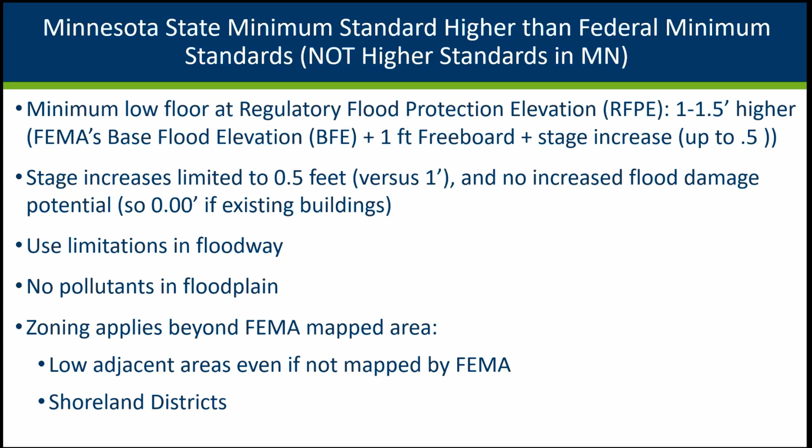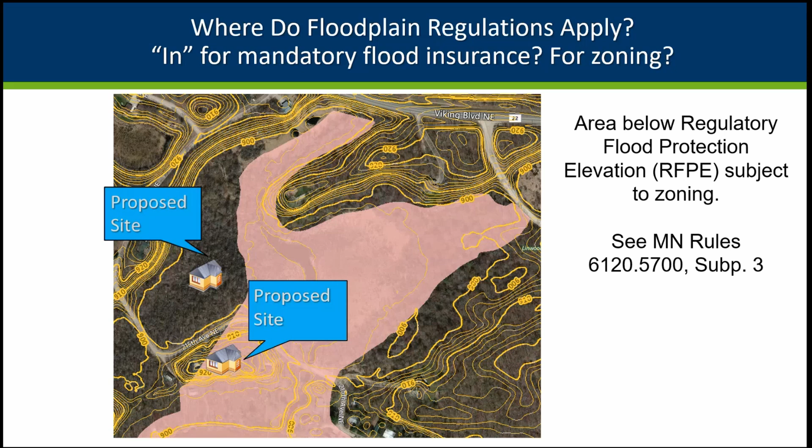We also have some regulations that regulate beyond the FEMA mapped flood zones. One of them is that if there's an area adjacent to the FEMA flood zone that's below the flood elevation, our state rules say you're still regulating that area below the regulatory flood protection elevation, even if the FEMA map doesn't show it included. Again, that's a state higher standard.

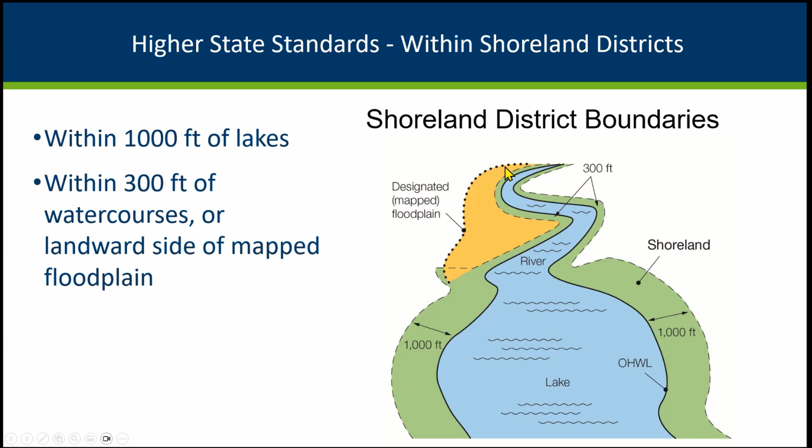Another big area where our state minimums get into areas beyond the FEMA mapped floodplains is in our shoreland districts. That's within 1,000 feet of lakes and either 300 feet of a river, or if the mapped floodplain goes further, that's part of the official shoreland area.

Within shorelands, we have lot size minimums, lot width minimums, and setbacks for structures. Within half the setback distance, we've got limitations on what kind of grading and vegetation removal can take place. We've got nice vegetation management and aesthetics screening requirements, and bluff protections, with a lot of good reasons for those bluff protections.

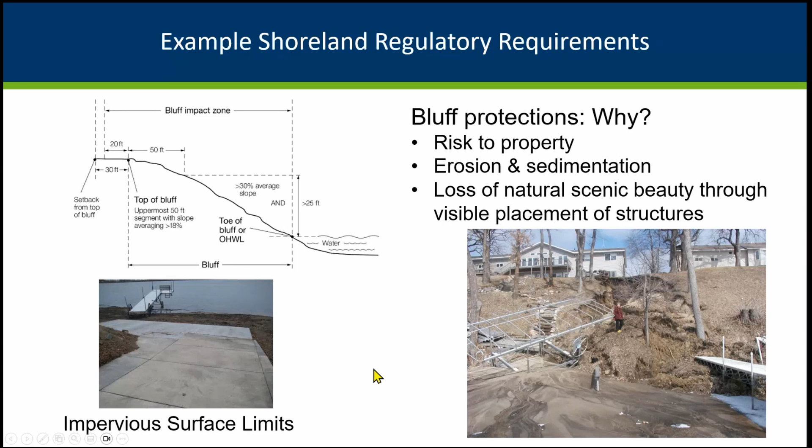Trying to keep that erosion from the bluffs out of the lakes and rivers, preventing buildings from being at risk, and preserving some of the scenic beauty that gets lost when you've got eroded areas. Another area is we have impervious surface limits in our shoreland rules.

The other reminder is that within shoreland districts, we do still require minimum elevations of buildings. Some of you have heard us talk before about how our shoreland rules were actually based on ones adopted first in Wisconsin. This is one of the differences between our shoreland regs and Wisconsin's — we added low floor requirements within that 1,000 feet of lakes and 300 feet of rivers, even if it's not in a mapped floodplain area.

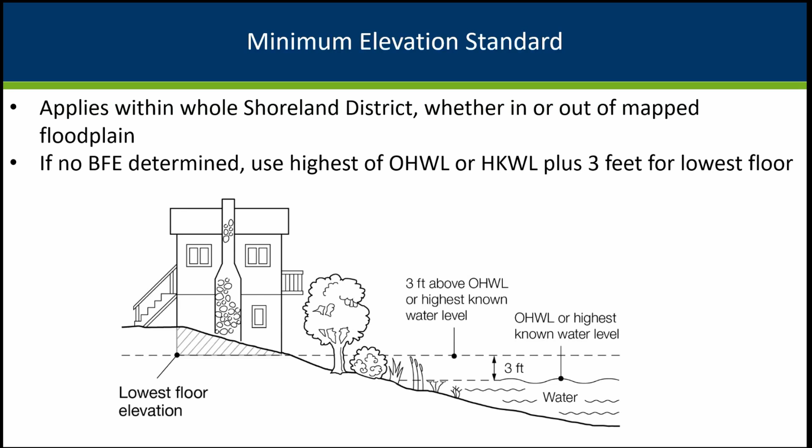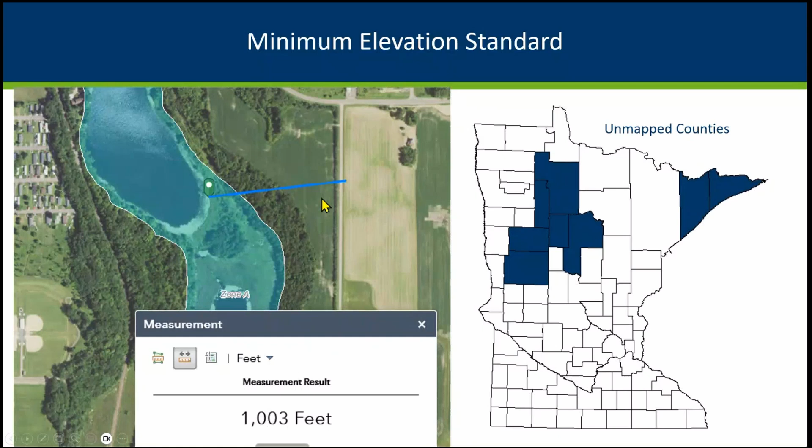Here's an example where we've measured 1,000 feet from the lake, and they still have to require the minimum elevations. For instance, in our 8 counties that don't have any FEMA floodplain maps, because they knew we had shoreland rules and that most development was within 1,000 feet of those lakes, they do have minimum elevations still in those areas.

Other higher standards exist in many states, and I was surprised when I started learning about what other states had, because I've grown up in Minnesota and worked here for many years and know our regs, but we've got higher standards in terms of regulating our public waters.

We don't allow filling in of those areas to create development areas. And we've got our more recent, relatively speaking, 1991 Wetland Conservation Act, where we protect a lot more wetlands beyond the public waters inventory of basins and require replacement of those areas that are allowed to be filled.

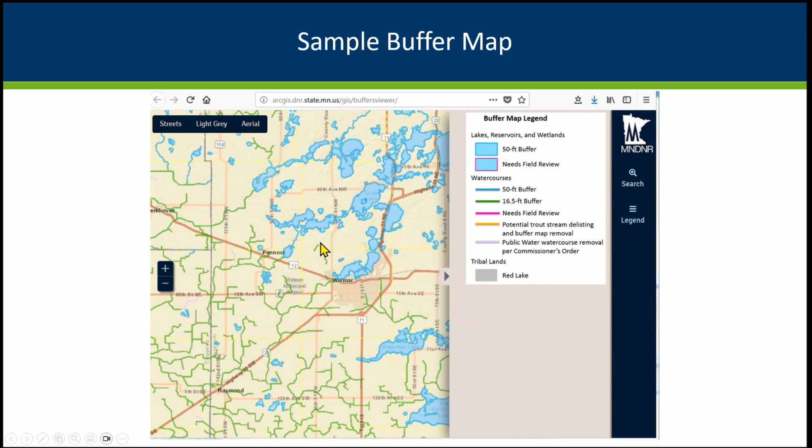And we had the buffer mapping effort a few years back. If you're not familiar with that, or newer to the state, we do have a website mapping these areas and showing the kinds of buffers that we have—either the smaller buffers more on ditch areas, or the 50-foot buffers more on the public waters.

Again, those are just a brief, quick update of some of the higher standards we've already got at the state level. So today's presentation is focusing on higher standards that go beyond the Minnesota state minimum requirements.

There are a lot of great reasons, and what makes sense in your community will vary, but many of the things we'll be talking about have to do with health and safety protections, protecting people from flooding risks. We're having increasing flood magnitudes due to changes in climate, and we'll talk about that a little bit more later.

For some areas where flood insurance is mandatory, higher standards can help save money on insurance premiums or prevent needing mandatory flood insurance, allowing you to choose how much coverage you want because you're not officially in the floodplain. There are communities that have many policies and have gotten into the Community Rating System, something FEMA runs.

If you're not familiar with this and your community has a lot of flood insurance policies, definitely reach out to us—we can tell you more about this program. It's basically a program where you show FEMA the higher standards, the better outreach and communication you have, all the good things you're doing to protect people from flooding and its impacts.

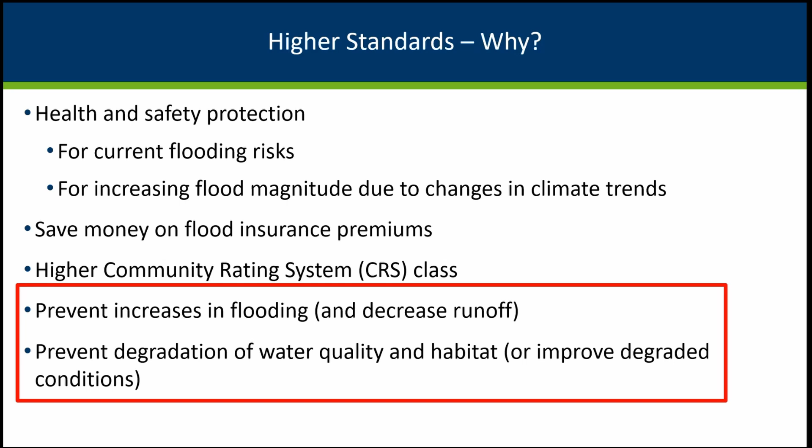Which is why we decided to call this 'floodplain and watershed higher standards,' because everything within the watershed gets reflected in those areas of potential flooding.

And speaking of watersheds, just a few slides here with Walter the Watershed. I have to give credit to Jenny Shilcock—she did these drawings, probably 10 years ago, but I think they show the progression nicely.

So here's Walter, he's happy: unaltered floodplain, free-flowing streams, diverse plants and animals, nice clean water. The stream banks are stable, we've got good infiltration and storage. Maybe we've got a barn here, a little cabin, but not a whole lot of development and disturbance.

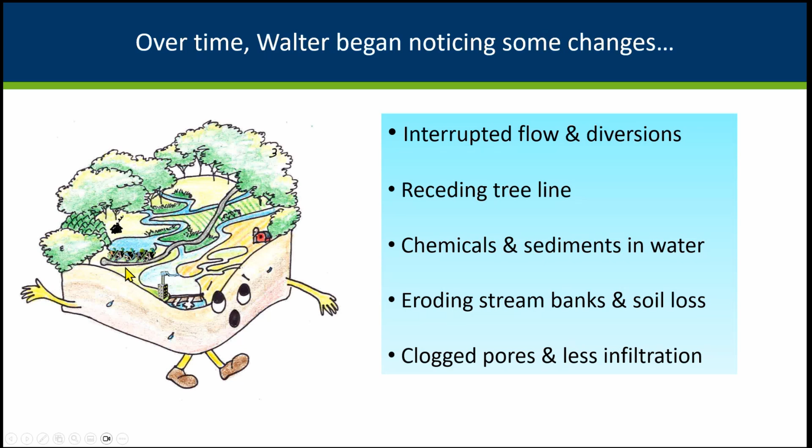But as development occurs, we start getting some interrupted flows. Here's a little dam, a bit more development, tree lines being removed, more areas going to ag or to buildings. We start seeing eroded banks, less infiltration, and more runoff in this case.

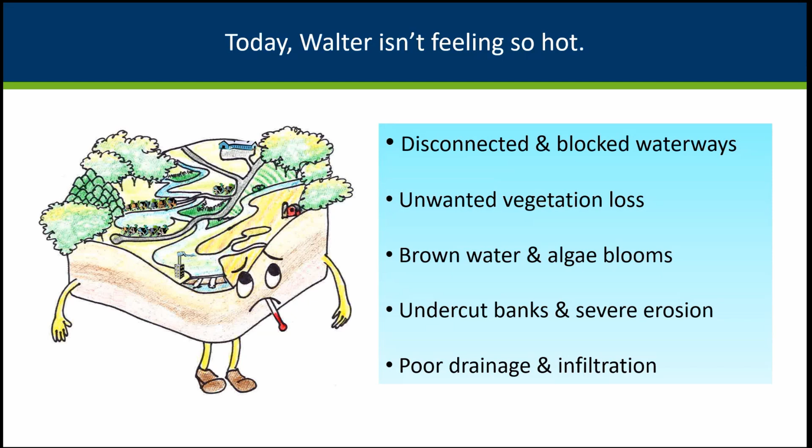And then even more development—we get bigger development, pretty much most of the vegetation has been altered. We definitely start to see brown water, algae blooms, lower water quality, poor drainage, a lot less infiltration, a lot more runoff. Who is responsible for the watershed's health, and how can we help Walter?

Because it really is the whole watershed we want to be looking at. Our regulations can help, but some other things we want to keep in mind is not just the land use, but that we are actually seeing changes in the rain. We're seeing it's a little bit warmer overall, the pattern over the decades, but definitely more of the water's coming in bigger and intense storms.

We're seeing just since 2000, the rains that are 6 inches or more are 4 times as common. And the rains that are bigger than 3 inches are up 65% over the last few decades. We're seeing more storms all times of the year, and that also means more ice jams and related risks during those times.

And we're seeing longer periods of high water in the last couple of years, and I'll have a couple slides to show this. Also more risk of landslides as we have longer, wetter periods, which sets up the situation where those steep areas are more at risk of sliding.

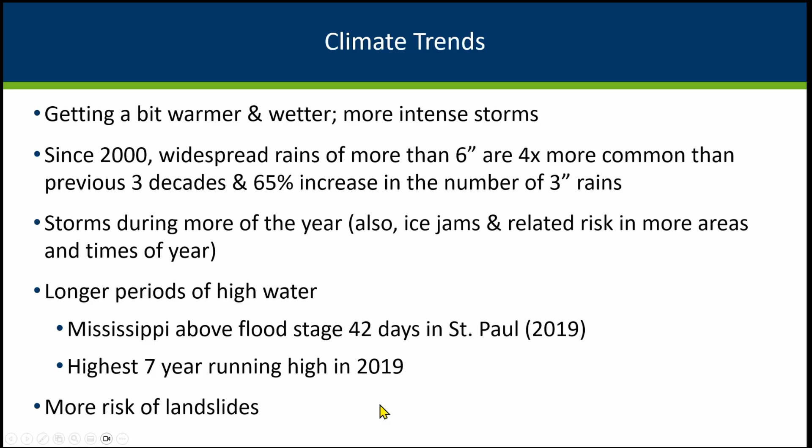If you're not familiar with this, you might want to take a look at the DNR's climate trends site. We've got some nice information there, and some cool tools. You can look in particular at temperatures and precipitation. You can choose one watershed or adjoining watersheds, or in this example I chose the entire state, and play around with it to look at the temperature and precipitation trends in your area.

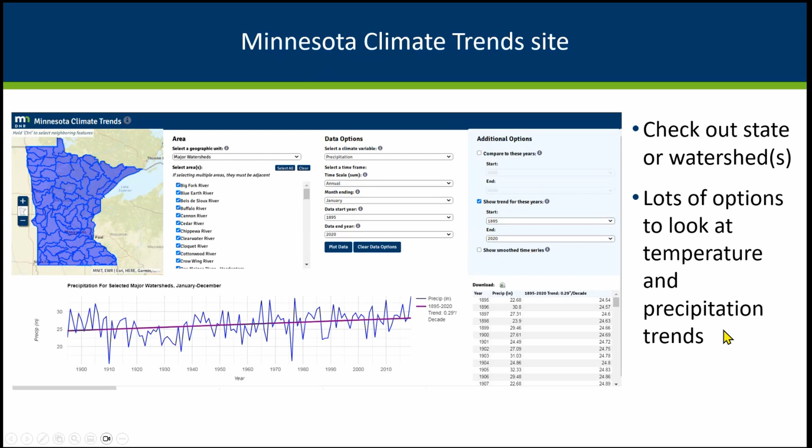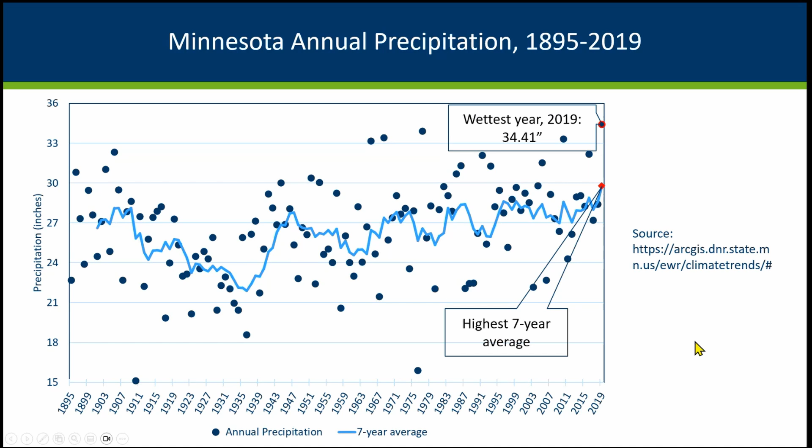Here's data pulled out of here that Kenny from our state climatology office put together, showing the 2019-2020 period, the longest, wettest period for the 7-year average. We were seeing way more of the lakes that were very high, especially those that didn't have outlets, because we'd had a particularly long period of wet. Now we've had more droughts, but we still are seeing those big storms and rain at times that we haven't had in the past.

Some of the other things we're seeing that we want to think about from a flooding, potential flooding, and land use perspective is we're seeing higher groundwater in some areas. Those water tables were high, especially at the end of that 7-year running period with the highest precip on record. So there's good reasons to look at minimum elevations in the entire communities, not just within the floodplain or the shoreland where it's required.

We're seeing more of those landslides and the stream bank erosion. We can get into some of the reasons for that in maybe another presentation, but we are definitely seeing more of that, and some of your communities in particular are seeing that.

We're seeing more of the urban flooding. Again, the big rains are affecting more areas that weren't built with stormwater management in mind. Many of the older developed areas in our region, our FEMA region, in Chicago area and other states, have had some really big rains and impacts that affected many, many people outside of the FEMA mapped areas in recent years. And speaking of unmapped areas, many areas were not mapped when FEMA first was doing the maps in the 70s and 80s.

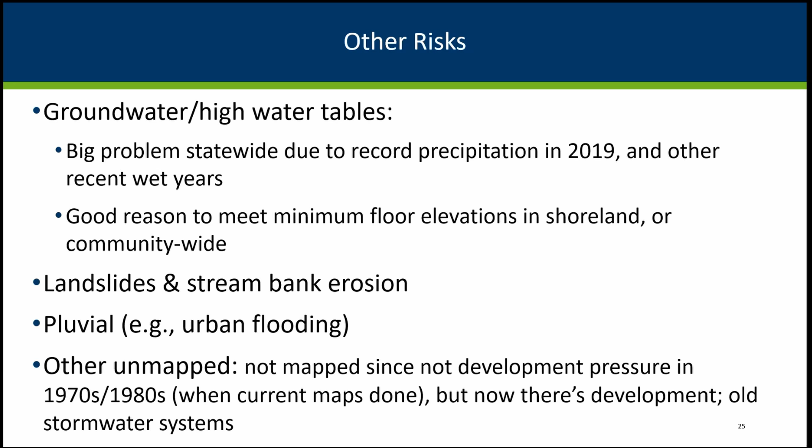And now as they update the maps, they tend to just keep updating the areas that were already mapped, even though there's many streams and flood-prone areas that they did not map in the past, and we're starting to see development there. So the other issue is that our state laws only are part of the picture.

Let's say this is your community boundaries, and say you've got a stream. You'd have regulations along that stream, either the public water regulations or your shoreland regs that cover within at least 300 feet, or the floodplain if it goes further, or you might have wild and scenic rules or other rules, or lakes where we regulate within 1,000 feet. But we've still got all these gaps in our communities where it's part of the watershed draining to those water bodies or to the low areas. And we're seeing more of those low areas within our communities being impacted because they don't have the stormwater infrastructure in place.

So why would you want to have protections for your community? Well, protecting your landowners, protecting your neighbors, protecting those emergency responders and first responders during times of flooding, not putting them at risk. If you have updated data showing your risk is higher, it's a good time to be looking at, should we be raising our standards?

Should we be updating our modeling and our maps? Looking at the water quality. Many parts of our state, we're relying on people who recreate in our areas and enjoy our lakes and rivers. They're fishing, they're hunting, they're enjoying their cabins. And water quality, we know, is tied to values of the properties along those lakes and rivers, and all those natural benefits that are the reasons people are coming to those areas.

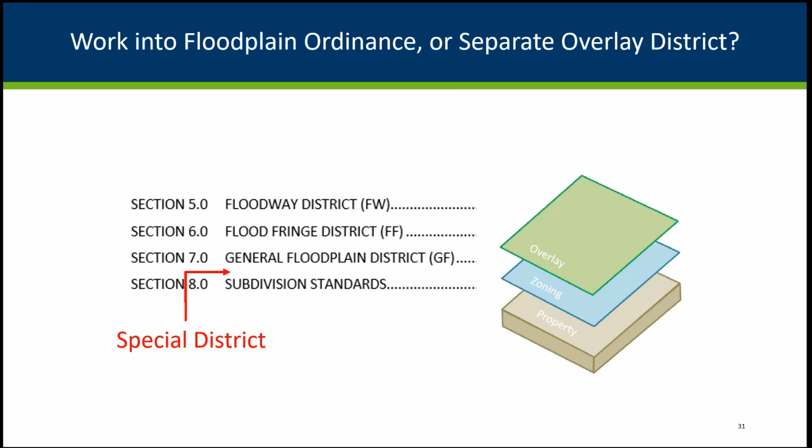In our floodplain model ordinance and our shoreland model ordinance, we show recommended higher standards with blue bold font in the version on the website in a PDF format, and we include these when we send out our recommended ordinance to communities, showing which ones are higher standards.

Even the communities that go through and look at each one of those blue bold areas and ask, does this make sense for our community - a very high percentage of those we're finding communities do adopt as higher standards. They look at the ones that are applicable, and might delete ones that aren't applicable. It's really been nice to see that.

We used to have these higher standards as a separate document shown to communities, but much fewer of those would get into local ordinances when suggested separately. Now that we've incorporated them into our model, many more of them are included.

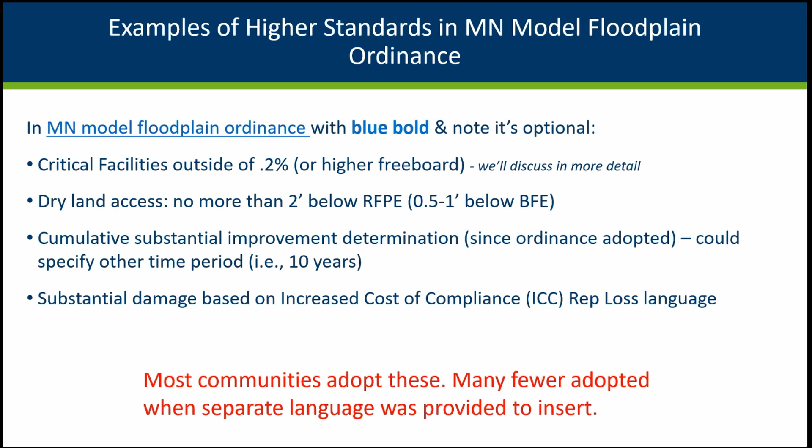We'll talk about examples in the remainder of the hour - things like higher standards for critical facilities, dry land access so you're not leaving buildings stranded in the middle of deep floodplain, higher standards for non-conforming buildings, and for substantial damage, basing requirements on repetitive loss language. This allows people to get increased cost of compliance as part of their flood insurance - basically a rider that if you have substantial damage based on repetitive losses, they can get extra up to $30,000 to help bring the building into compliance, making them more resilient for future floods.

Again, what can communities do? You've got your toolbox with higher regulations, either those suggested in blue font in our state model floodplain or shoreland ordinances, or other ones we're recommending elsewhere, like in this presentation and on our innovative regulations pages on our website.

We also want to encourage you to look at a bigger toolbox, tools beyond higher regulations - think about watershed level planning and prioritizing. In Minnesota, we're doing that now with our One Watershed, One Plan, with great work together at the watershed level between local government, the state, others, and between communities.

Better risk communication isn't necessarily regulations, but doing a better job helping people know where the risk is in their community and making them aware of optional resources. Some communities are looking at better policies for community properties, like making more land native vegetation for natural infiltration. Many SWCDs and watersheds have great trainings and cost share options for these beneficial activities.

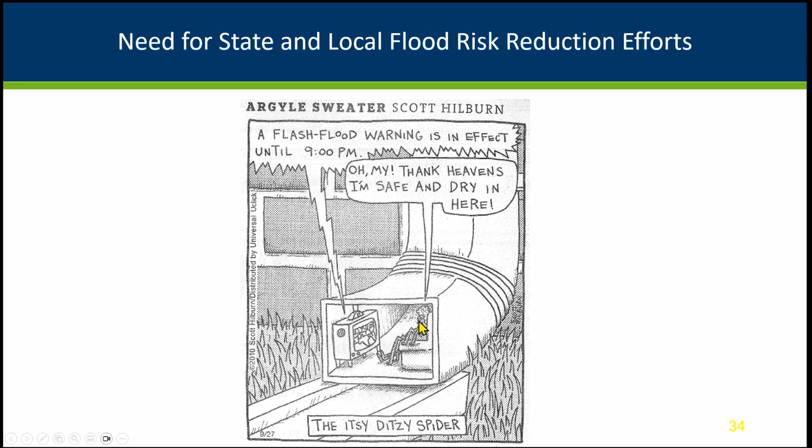The cartoon here: flash flood warnings in effect until 9 p.m. - our itsy ditzy spider, oh thank heavens I'm safe and dry in here. This is an example of where some communication on true risk might be helpful.

We've been working on a floodplain page like this. I had originally hoped to have it ready before today's presentation, but didn't quite get it there yet - we're hoping to have it ready in the next month or two. So let's start talking about some different categories of other higher regulations, identifying and regulating risk outside those flood-prone areas, outside the FEMA mapped areas, or outside the shoreland areas.

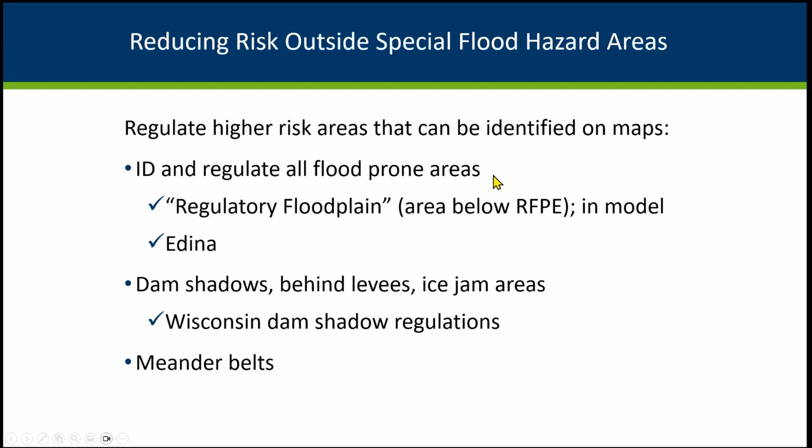But as we allow development in the flood fringe area, that squeezes in the area that floods have to go during floods, and it actually increases the flood elevations. If you looked at that increased flood elevation, you're really impacting areas that go outside the mapped areas.

So here's this concept of regulating, looking at your regulatory flood protection elevation, which includes that stage increase due to allowing filling in the flood fringe, and works in our state minimum 1 foot of freeboard. It can cover a bigger area. In the flat areas, it's going to be a pretty wide area it would cover. In the steeper areas, it's not as wide.

This is an option. This is the concept the feds have started to use for federally paid for projects done by public entities, that if federal funds are going into road improvement or mitigation projects, they're supposed to be looking at this extended area adjacent to the floodplain and building higher and safer. So this is one way to look at it, is regulate the area covered by the full regulatory flood protection elevation, not just that covered by the 100-year floodplain or something in between.

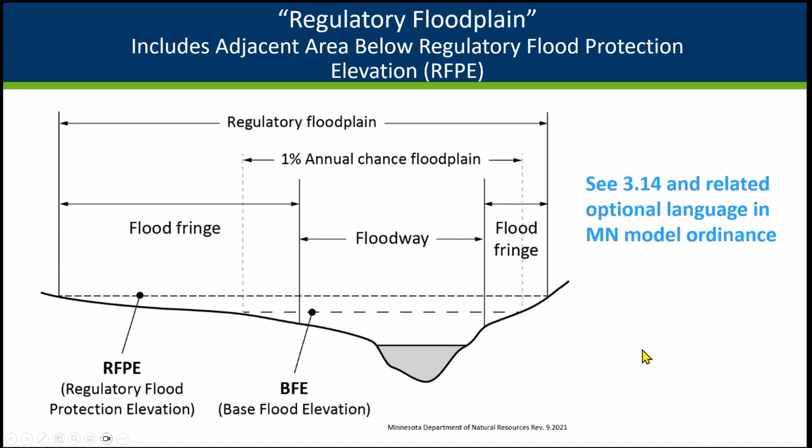State of New Jersey, they actually regulate - I think they take 1.25 times the flow and figure out what that covers, and they regulate that area. So that's a different approach, if you like that kind of scientific based approach, that's another way to look at extending the area you regulate.

They're limiting the fill, or at least the net filling, and they're requiring permits if someone wants to do work in these areas, making sure that they're not filling in their storage areas that are helping to protect the buildings in that community. So for a first tier suburb like Edina, this is a great way to help protect those citizens. You don't have as many ways to protect them and reserve areas because most of the development has already occurred.

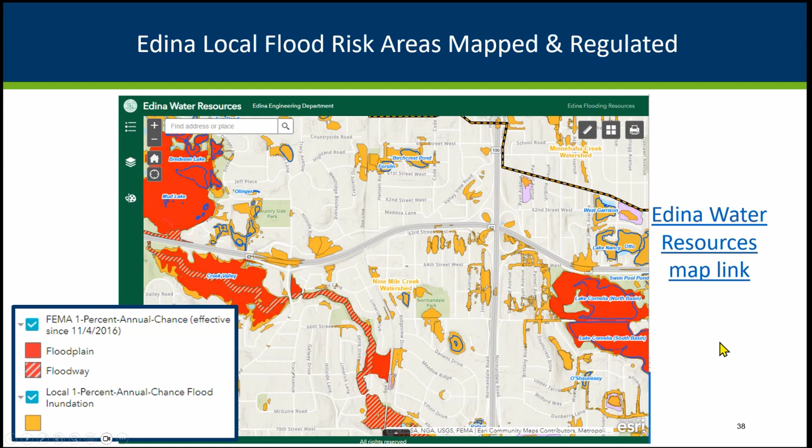Or another example would be if you're downstream of a dam, and those are higher risk areas, especially the high hazard dams. We don't have state or federal minimums saying you need to protect those areas, but definitely something to think about.

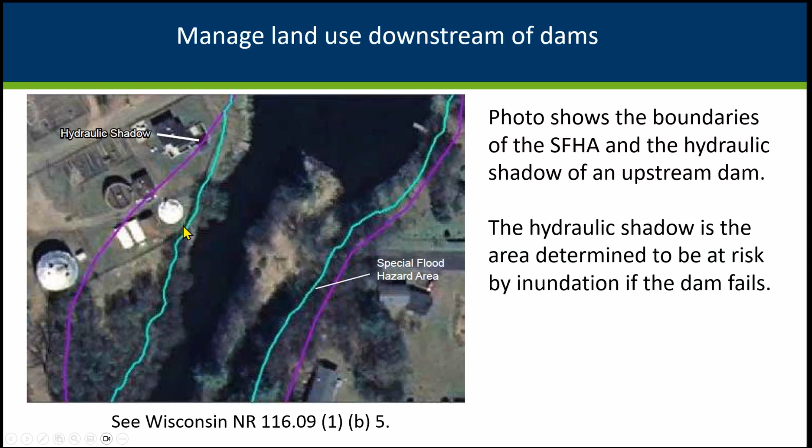We've got the Wisconsin law that's been on the books, I think for like 50 years, been on their books for a long time anyway. They do protect that hydraulic shadow area downstream of dams.

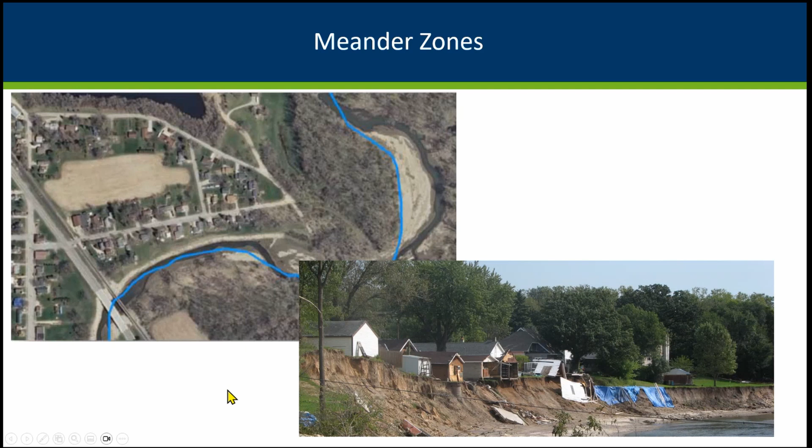Anyway, this is something you do see, rivers are dynamic. Here's an example in southeast Minnesota. The stream had been here, but then after the 2007 flood, it moved, it cut into this block of buildings - that's what you're seeing here. It moved over here. Another great example of dynamic streams, and thinking about what can we do to protect some of these buildings. There's a lot of good reasons to have a meander belt, some kind of mapped area where you're going to protect within that area or have extra levels of setback or protection.

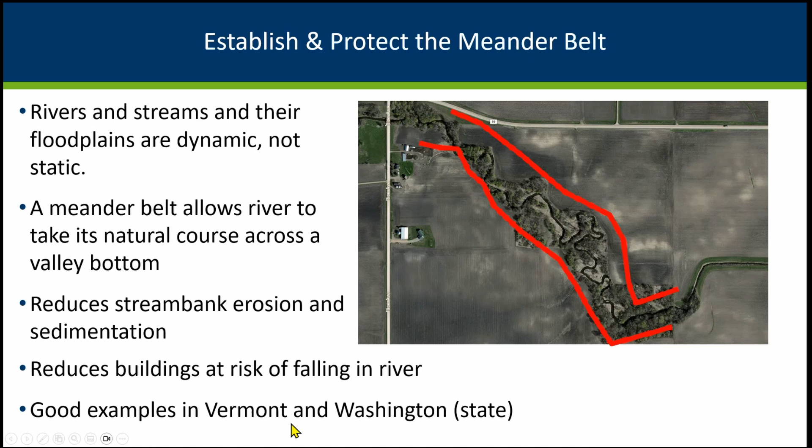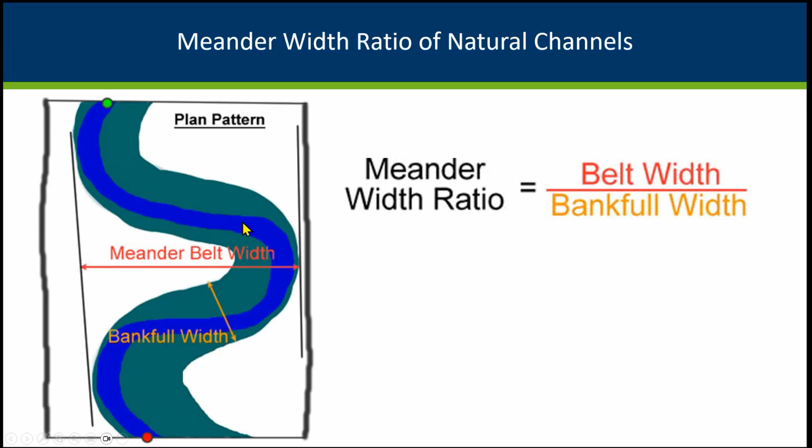Allowing the stream to take its natural course, but basing where you map on science, trying to reduce the stream bank erosion you're seeing and reduce buildings at risk of falling into the river. We've got slides showing examples from Vermont and Washington state, and there's science behind it. If you're interested, we can work with folks who study natural streams, looking at stream age, soil types, and slopes to determine the expected meander width in an area. There's a lot of good information here, including an info sheet with background, and more from the River Ecology Unit on their website.

Just a quick mention of other states—they do have some standards. Again, you look at what makes sense in your community.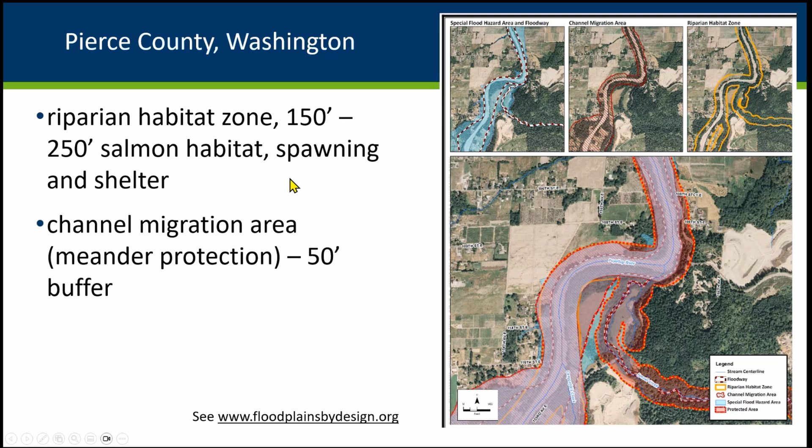In Washington, they're very concerned about salmon habitat and spawning, so they're looking at setbacks for that, and at the channel migration area to try to protect those zones. They've got a newer version of their site with some cool videos explaining the reasoning and main concepts behind it. If you want to learn more, I suggest taking a look at the floodplainsbydesign.org site, which is a public partnership between the state of Washington, some communities, and private organizations.

In Vermont, they've got some great information on their page, including a 'Living in Harmony with Streams' resource aimed at citizens. A lot of that could be applicable in many of our communities for outreach, if you're looking for outreach ideas.

Other things you could do: cities with lakes and rivers that haven't been told by DNR that they had to adopt shoreland management regulations—maybe because they were small cities or didn't have development pressure at the time those priority lists were made—can still adopt shoreland management regulations or a variation on them. They can always adopt them even if DNR hasn't required it, looking at minimum elevations and setbacks community-wide.

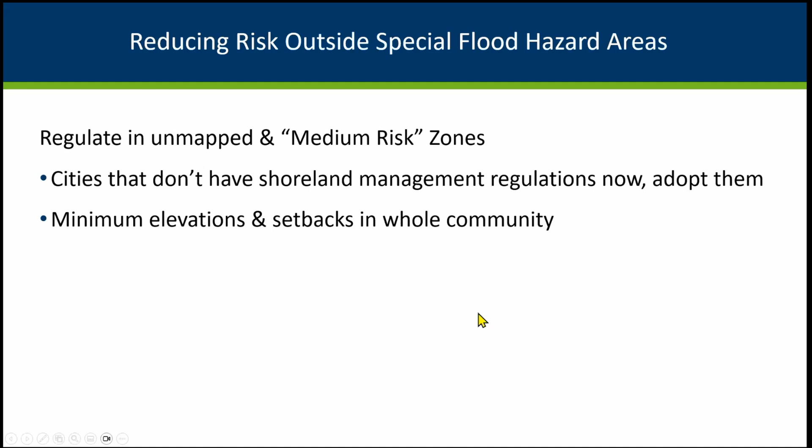In the 80s and 90s, Plymouth was growing like crazy, with lots of developments going in around these wetlands. They weren't big enough or wet enough to be classified as lakes and rivers covered by shoreland management regulations. So they couldn't do things below the ordinary high water mark, but above it, there were no state minimums they had to meet. I was the area hydrologist at the time, and I made lots of comments suggesting that even though it wasn't a shoreland district, they should really look at bigger setbacks and minimum elevations.

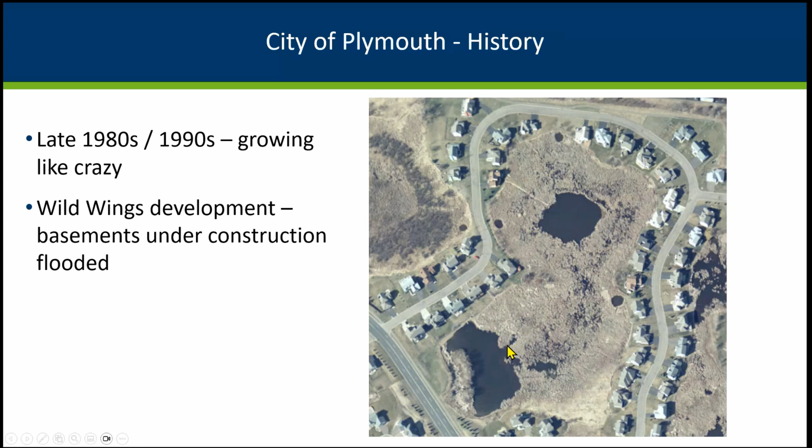They didn't listen. Here's another development, same situation. Then they had some rains, and I had great pictures—I can't find them now—but I had pictures of when the foundations had gone in, and they looked like swimming pools, because there'd been a big rain and they'd put in basements right next to the wetlands.

So they learned their lesson from that development. Then there was another development where the builder told everyone, 'Call DNR, and if DNR will let you do it, you can do it.' So I had all these people calling me saying, 'I want to build out my yard, I want to put in a deck, I want to put in sheds.' And I kept having to tell them, no, you can't do any of that—that's below the ordinary high. You've only got 10 or 20 feet between your house and the ordinary high; that's where you can do things.

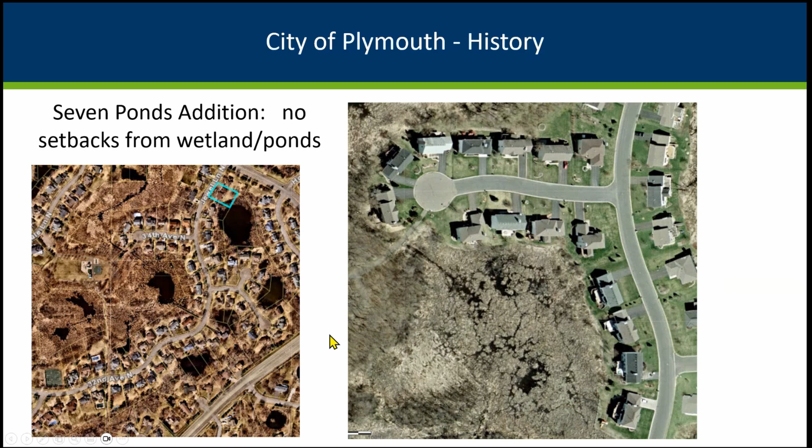As a result of these people's complaints, their elected and appointed officials became more aware—this is where those two developments were. People became more aware of this, and the city adopted minimum elevations for low floors citywide.

They had a city stormwater management plan, and they divided everything into sub-watersheds, figured out their 1% in all those areas, and started requiring a 2-foot elevation above the 100-year for all those basins, all the flooding sources, including all the little stormwater ponds.

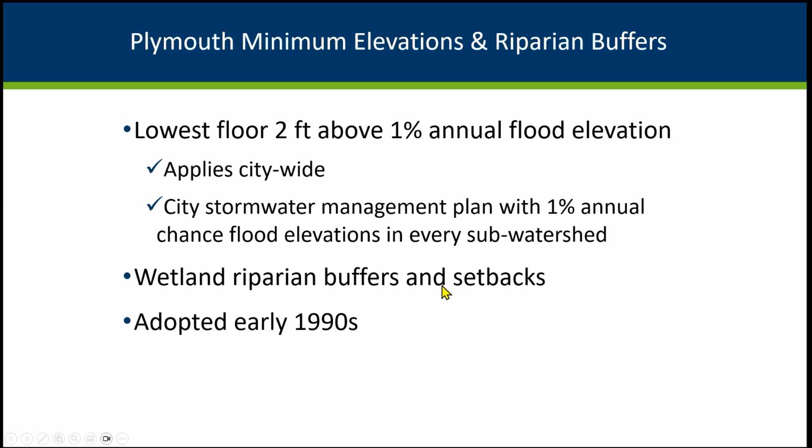They looked at their wetlands and realized parts of the city were still developing, so they asked what they could do to protect some of these areas for the future and have setbacks that are more reasonable. They classified their wetlands into different categories - higher quality, middle quality, lower quality - with different setbacks and buffer areas depending on wetland quality. A great effort that the city went through, and they did a lot of work when they did that.

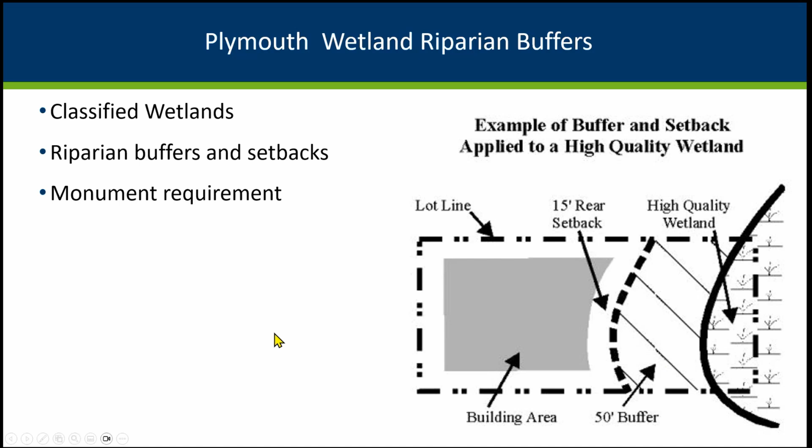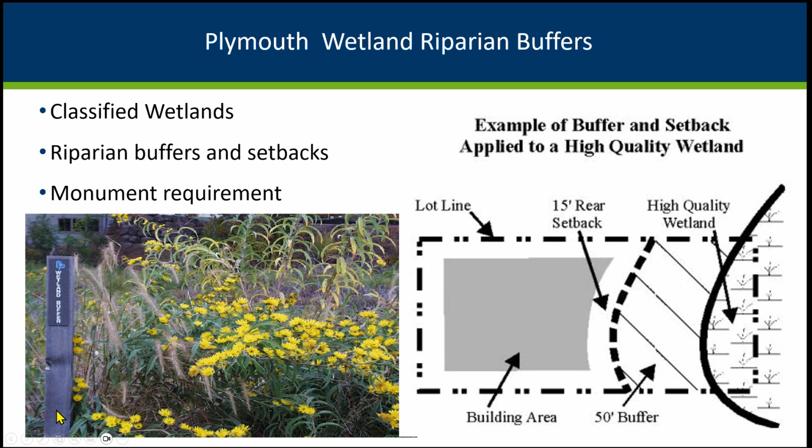They also added a monument requirement at the edge of the wetland, putting up monuments showing where the buffer went to. So they had this mandatory buffer with nice physical markers so people were very aware of where the edge of the buffers were. This is a picture taken in the 90s when they were first doing that.

Moving on, talking about completely different requirements, looking at restricting critical facilities in the floodplain. Cedar Rapids - you probably heard about the big flood they had there. They had a hospital and a prison on an island that got flooded, and that was very traumatic, trying to get records out of there and get people out of those flooded areas.

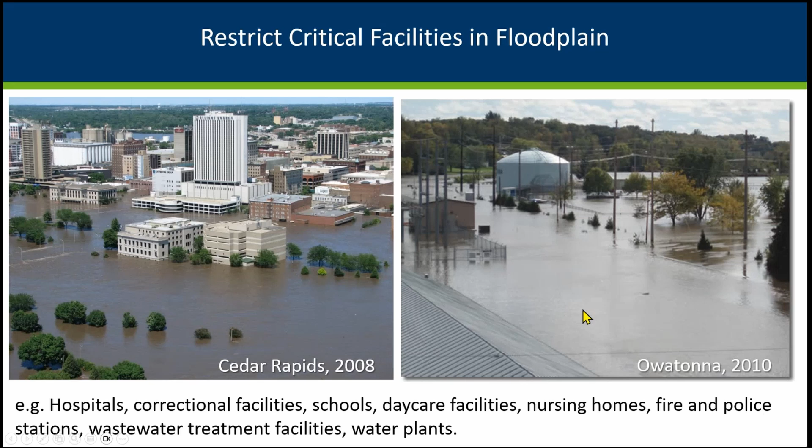Picture from Owatonna in 2010. Here's working on Methodist Hospital in St. Louis Park in 2014 when we had high water, and a well house in Owatonna. Just all of these places where we've got either the main utilities for communities - water supply, electric supply, wastewater treatment. Even if most of the buildings were protected, if they haven't got those utilities, then a huge part of your community can be impacted by a flood.

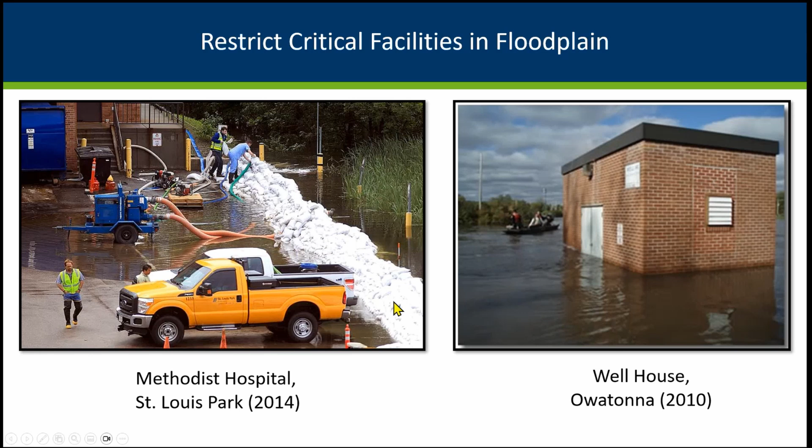And they don't need the extra work and stress of trying to build all these temporary sandbag facilities. So trying to save that grief during floods, building smarter and safer when you are putting in new utilities or other critical facilities - hospitals, nursing homes, schools, prisons, some of those kinds of things. Trying to not have any new ones in the floodplain for sure, and then retrofitting and fixing what you can for the old ones. This is in the national training that FEMA offers at their Emergency Management Institute.

I knew that they had this picture in their training when I went to it like 15 years ago. Gary was just there a couple weeks ago - they still have this picture and this example in their training that they use at EMI, showing a Rochester facility that had flooding, and unfortunately 4 people died in that '78 flood.

The good news is that Rochester's done a lot of great work. Since '78, they've got all their reservoirs around the city. They did other work, and had a really big similar magnitude flood just a few years ago, and we saw little impact. So kudos to Rochester and the many other communities that have done a lot of good work in Minnesota. But also a reminder that as new facilities are planned, look at whether they're in the 500 year floodplain, look at higher protection for them.

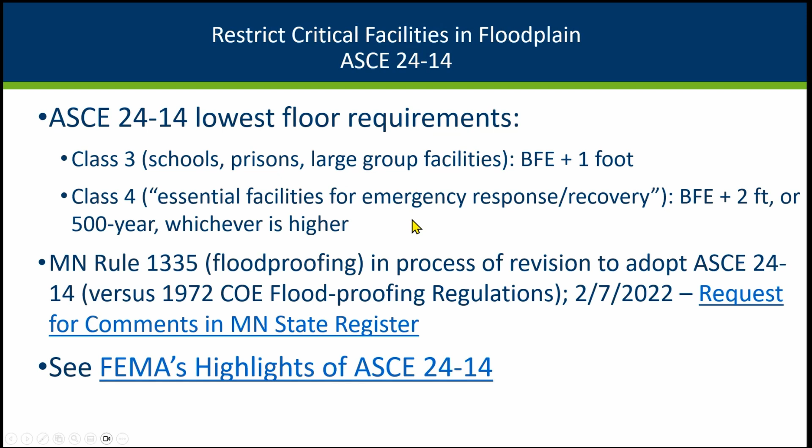The Minnesota floodproofing rules, Minnesota Rules 1335, we're in the process of updating those rules to adopt the ASCE 24-14 standards, because the current regs reference the 1972 Corps of Engineer floodproofing regs, which I know the majority of you were not born when these came out in '72. You can see more details about ASCE 24-14 in this link to some highlights that FEMA and ASFPM have. Again, that's something that is coming - we do have it as a higher standard in our model ordinance, and it will be a requirement in the future.

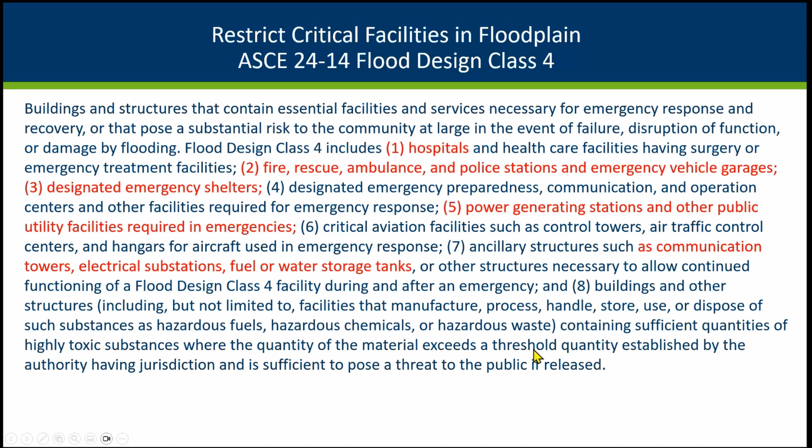This gets into just a little bit more detail about what's considered Class 4. It talks about hospitals, fire rescue, the utilities required during emergencies, communication areas, fuel storage tanks, and lots of other areas.

And this is a summary of those standards. So other standards that some communities have is they're saying, hey, we've been through floods. We've seen the trauma that it causes. We have big enough lots. Why are people building in those lower areas? They should be smart enough to build on the top in the higher areas. And since sometimes they're not smart enough, we're going to encourage them to build in those areas that are safer.

So many of our rural counties we've seen start to require that no new buildings are going in the 100-year floodplain. And many of the small communities that don't currently have development in their FEMA mapped areas, the special flood hazard areas, they're adopting our simplified state ordinance, which basically says no new buildings are going in the floodplain. If their development pressure changes in the future, they can change and update their ordinance to allow more.

But many of the cities are saying, well, we don't need to develop in those areas. Those are low areas. Those are not areas we should be developing or encouraging development. Let's go ahead and adopt this stricter floodplain ordinance that says no new buildings are going in these areas. And many communities have higher minimum standards than the state rules. So here's some of the communities that have higher standards.

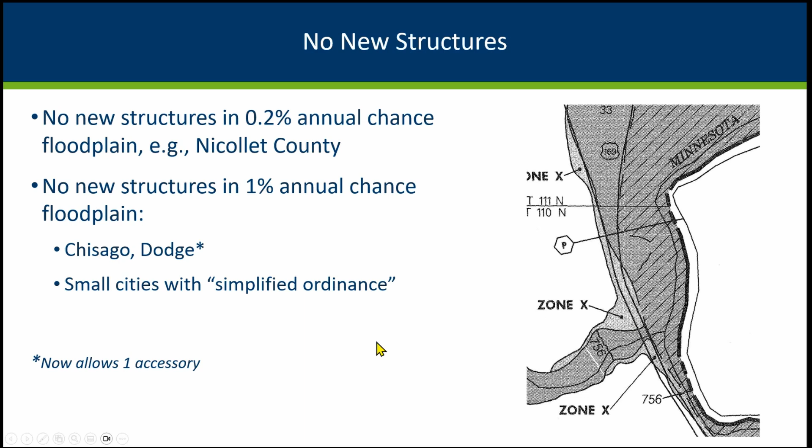Nicollet County for decades has not allowed new structures even in the 500-year floodplain. Well, that was initially because the zoning administrator at the time misunderstood the dark versus the light gray shading on the maps and was just saying you can't build in these shaded areas. But then the county did adopt rules consistent with that misunderstanding of the maps at the time. Chisago, Dodge, Mower, I believe, many of the counties are adopting these standards.

In our model ordinance, we do have access requirements saying that you should have access no lower than 2 feet below the RFPE, which is half a foot to a foot below the flood elevation, so that vehicles don't have to go through deep water as floodwaters are going up and coming back down, so that emergency managers and the first responders don't have to put themselves at risk going and rescuing people as they start to get flooded.

Well, and along those lines, up in the Red River Valley, there were at least a couple of the counties where the emergency managers, the first responders said, we will no longer go out and do rescues after dark. We're not putting our first responders at risk after dark because you're out in these areas running your generators and trying to do flood fighting. You can do that flood fighting during the day, but get off those areas at night because we're not going to have response folks going out there.

And I understand that people got very creative with how they kept their generators going.

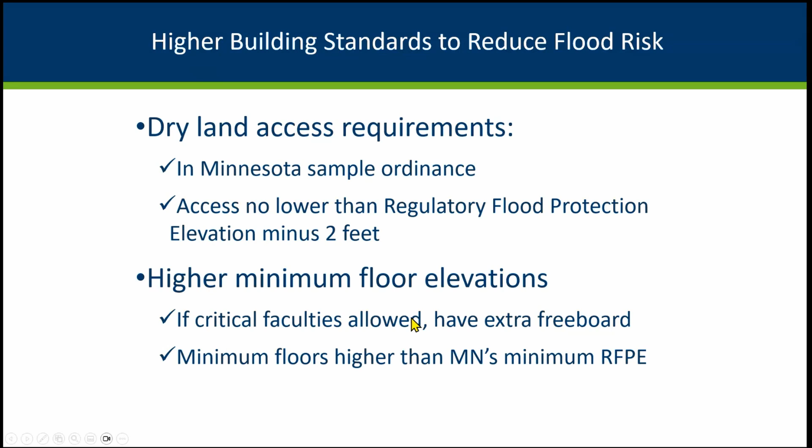As I mentioned, the critical facilities at a minimum, having them have higher standards, and more of our communities are going with higher minimum standards.

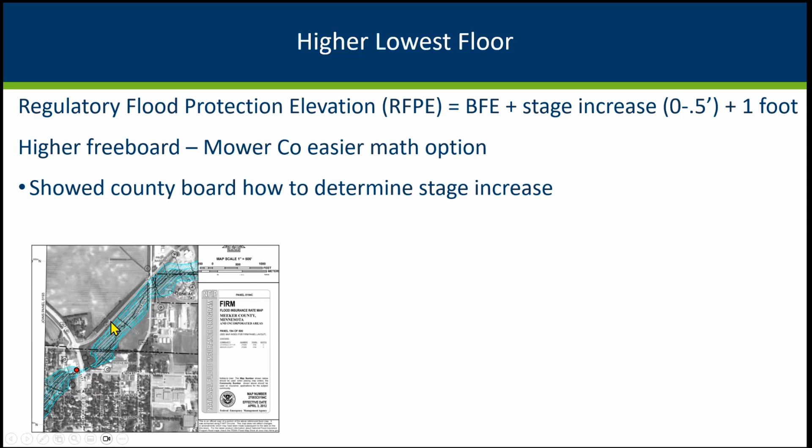Here's an example when Mower County was talking to their county board and explaining what they had to do. They had to look at the map, figure out what the cross sections were upstream, downstream, go to the flood insurance study, figure out what the stage increase was, add that to the foot of freeboard and to the base flood elevation. And it was a pretty complicated process. And in the end, the county board supported, let's just go with 2 feet. Let's not have to do all these steps here and figure out what the exact number is. Let's just round up and say we're going to use 2 feet for our minimum elevation, and that'll cover all those scenarios.

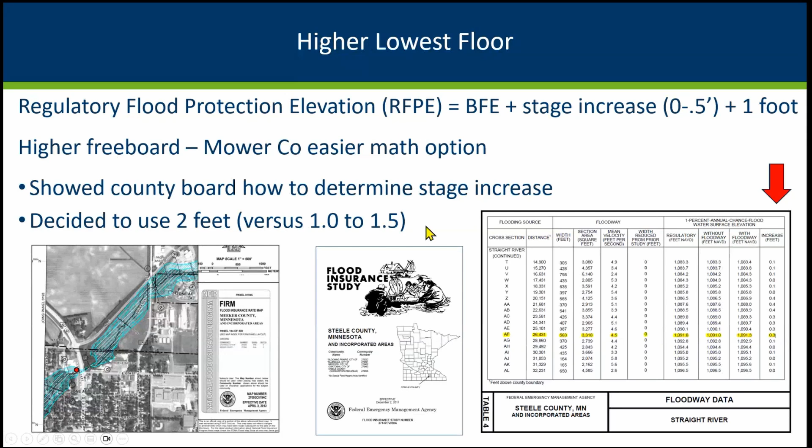Our watersheds, we've had watersheds authorized since 1955, and we've got a lot of watersheds doing some great work. They can adopt rules, they can do projects, they can acquire property and have grants. Many of the watersheds have been around and doing these things for decades and doing some great work.

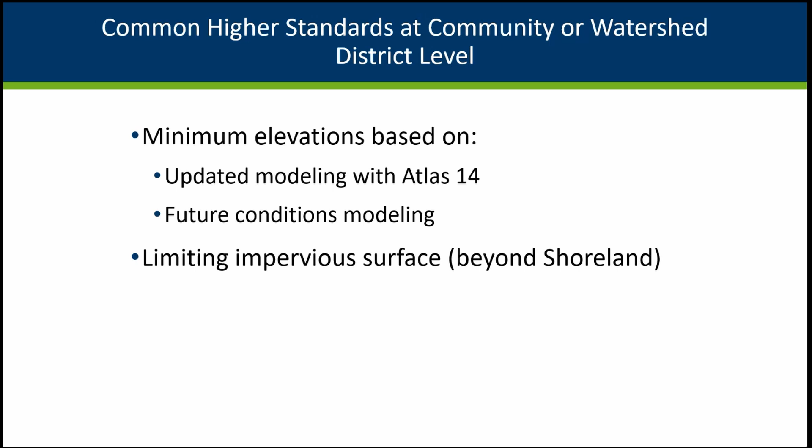Some common things that they're doing is they're updating their modeling with the latest data. They're doing some future conditions modeling and updating maps and regulating based on that. Some of the communities and watersheds limit impervious surface beyond what shoreland rules require. Some you can be looking at higher standards saying, hey, another thing to look at is how does the 500 year compare to the 100 year? We've got big areas with 500 year. Maybe we should be making sure that we're meeting the difference going above our 500 year.

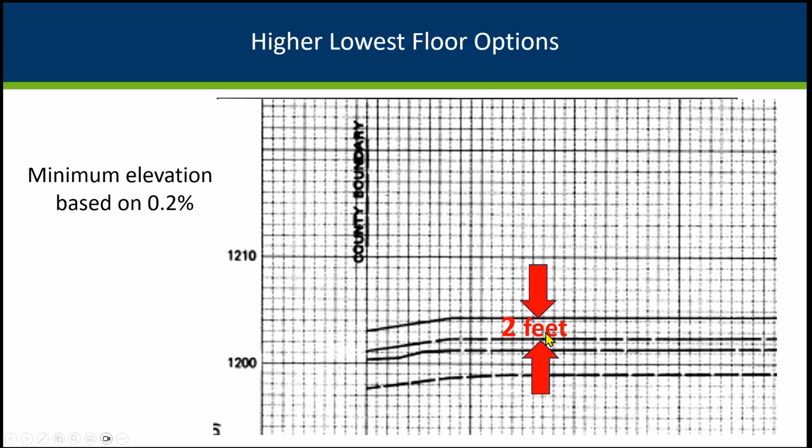And in this example, the 2-foot conveniently would meet that for much of the county. This is an example in Charlotte-Mecklenburg in North Carolina. They've got the FEMA maps, and then they looked at what their ultimate build expectations were and what the flood elevations would be.

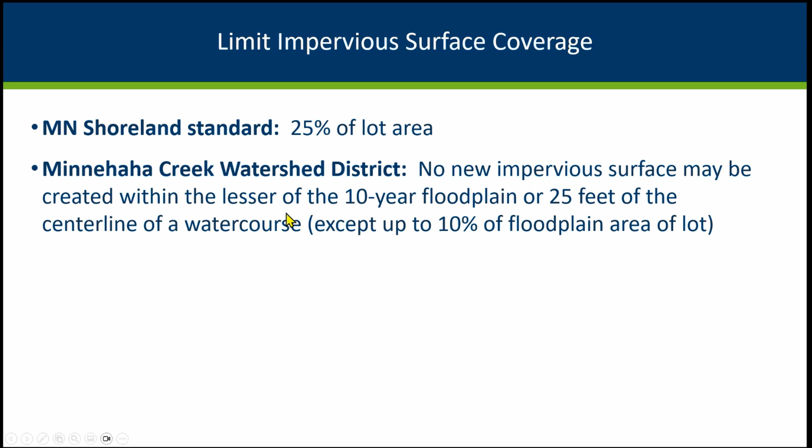And so they show the floodplain based on ultimate development, and they have higher freeboards based on whatever that long-term development's going to be. Back to impervious surface, this is an example. Minnehaha Creek's got language about impervious surface within the 10-year floodplain that's higher, a higher standard. And many of the watersheds in cities look at not increasing the peak rates of runoff, or they're incorporating water quality improvements, doing infiltration of the first couple inches of runoff, all kinds of different things that they're looking at.

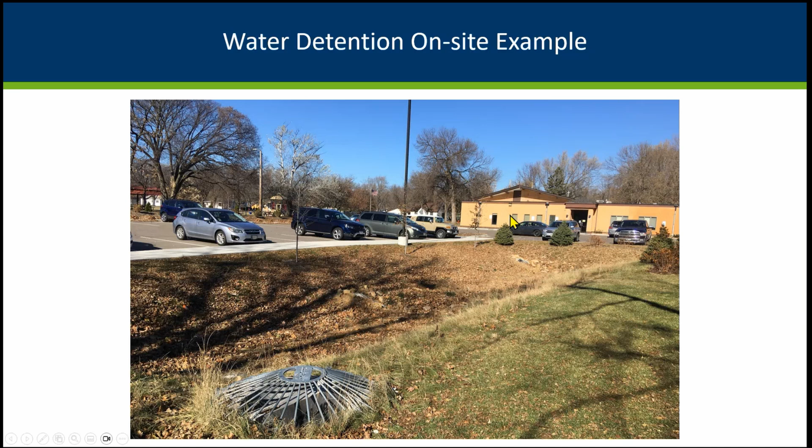If anybody from the watershed's on, you can put in the chat what that requirement is. But as I recall, they had some tanked extra storage beneath in addition to some of these open space pond type areas. Other watersheds and counties have no net loss of storage that's stronger than the Wetland Conservation Act requirements.

Dakota County, talking with Dee about that, she said that because they require it on the same parcel, and that's hard to do, it effectively means not very many people do filling in the floodplain because they can't find another place on their parcel to do their 2-to-1 compensation.

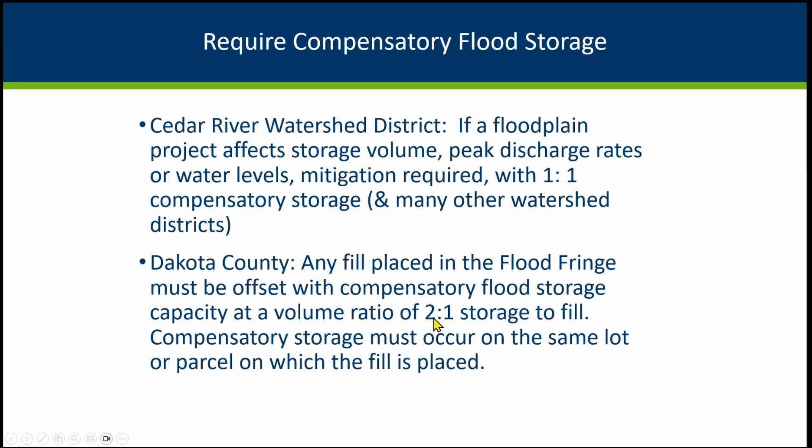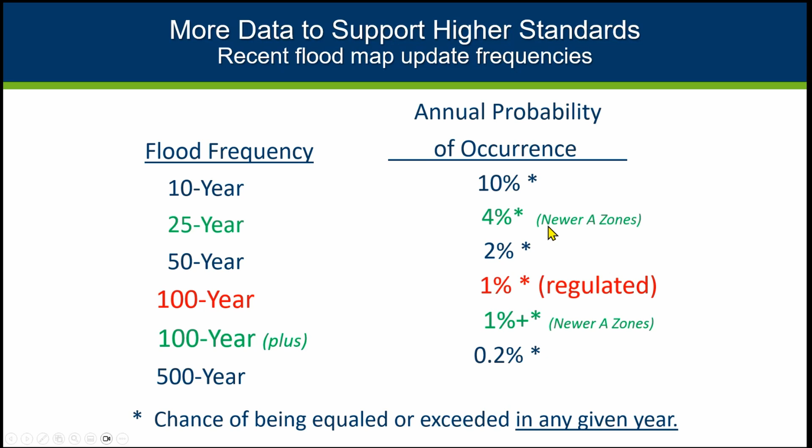And we have more data to help support this. We're getting the 25-year flood elevations in the newer A zones where we're modeling, and the 100-year plus. Traditionally, they look at the median of where that flow is - that's what they use for the modeling for the 100-year, but it actually does vary. So they're looking at this, the upper edge.

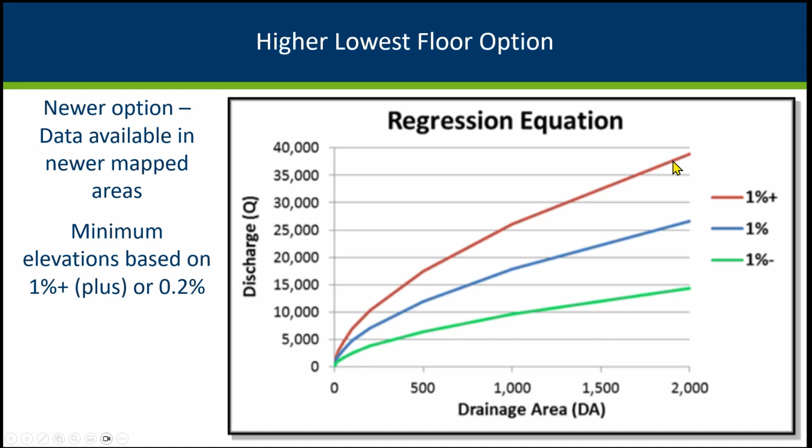And how does that compare to maybe the 500-year in a community? Should they be regulating based on the 100-year plus or the 500-year rather than just the 100-year?

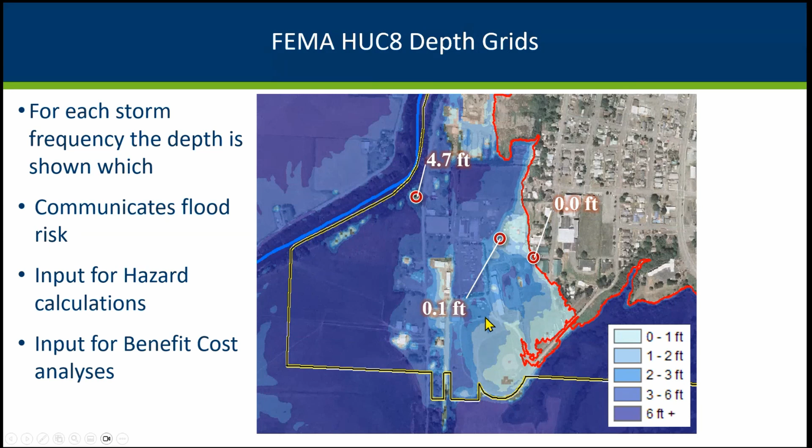I'm down to like the last 2 minutes, so I'm just going to talk about some other communication options that our mappers talk about that are possible - some depth grids that look at it in terms of probability over a 30-year mortgage period. We've got some nice information encouraging retaining natural vegetation, talking about the benefits of retaining the natural vegetation, preventing erosion, water quality problems here.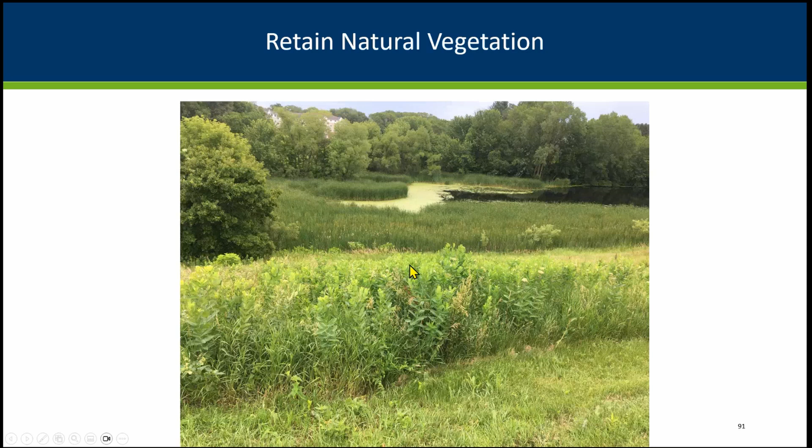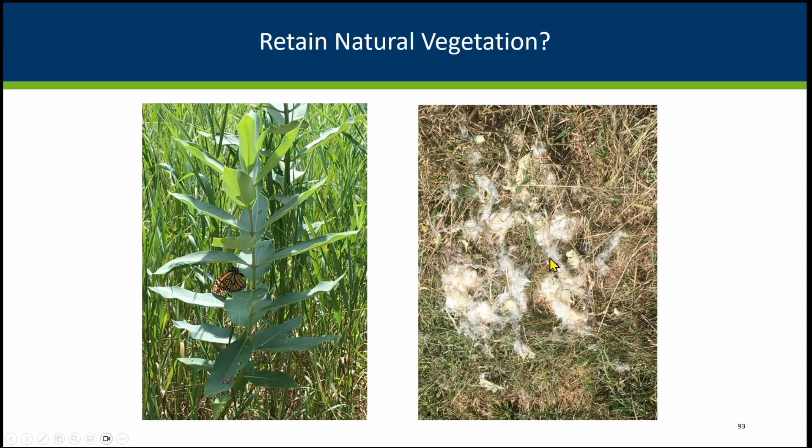Again, retaining natural vegetation, getting your communities to not go and chop it all off. Here's a local example where literally the day before they went and chopped it off, I'd taken a couple pictures, and this was the day after they chopped it off. Here's another example where they went and chopped down the plant I'd taken a picture of the day before because I was trying to figure out what plant that was. Now I know it's a milkweed plant.